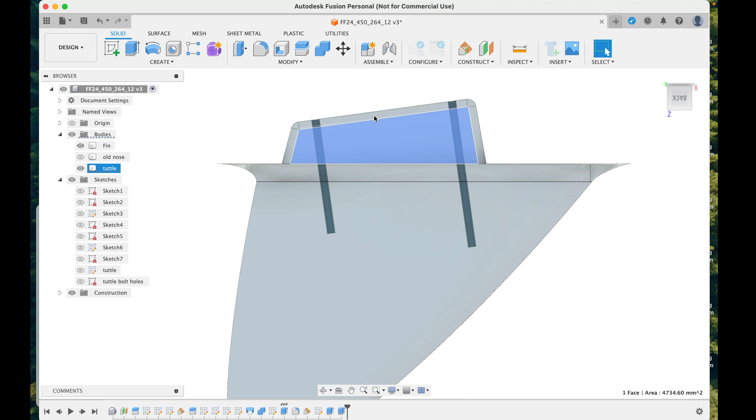So you want to create a sketch on this plane, and then we can push P for that, so we draw perpendicular lines. Doesn't really matter. And then constrain them to perpendicular. Oh, it's already been applied. Perpendicular, that to there. It's already done.

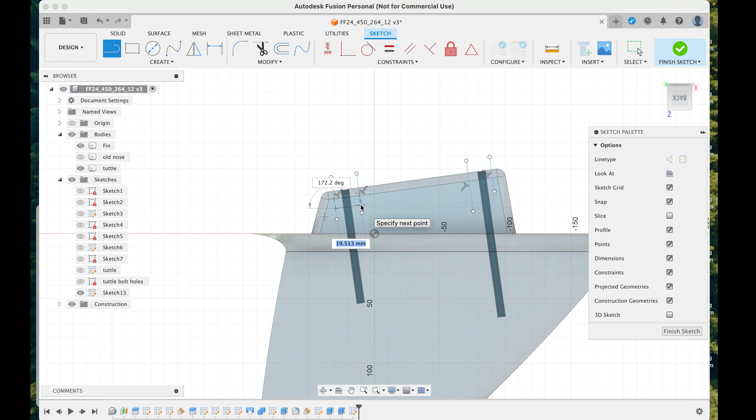And then same up here. And final line. Perpendicular. And then draw the nut recess perpendicular to that. And close the sketch. Finish the sketch. Looks a bit rough, but it'll work for our purposes.

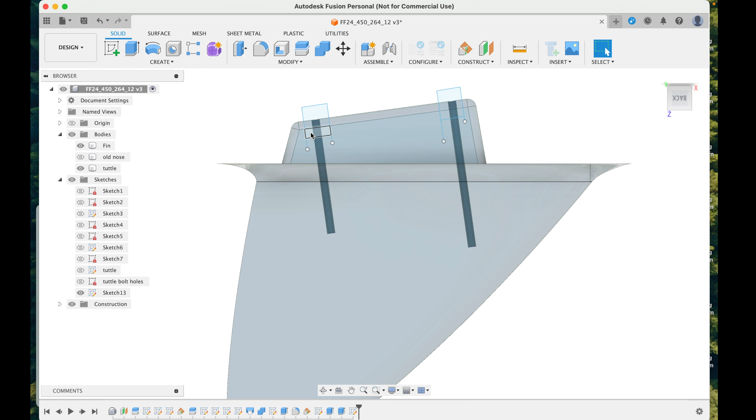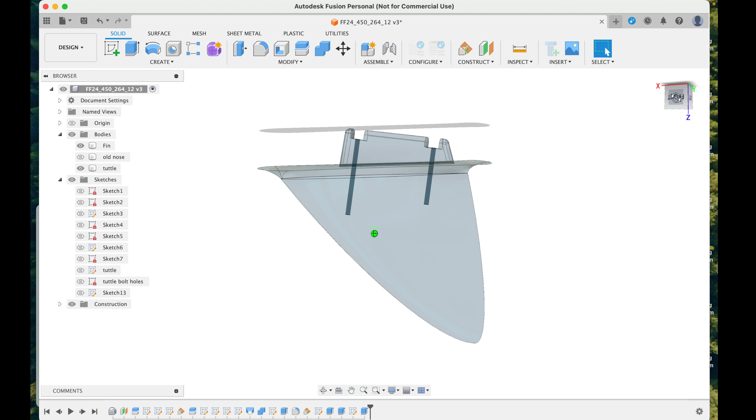Select those, push extrude, look at it from home position, drag it across, and we now should have the tuttle recesses. So that means we can put nuts here onto the threaded rod, and then another nut down here. So what we want to now make is the embedded nuts, so these nuts can pull against.

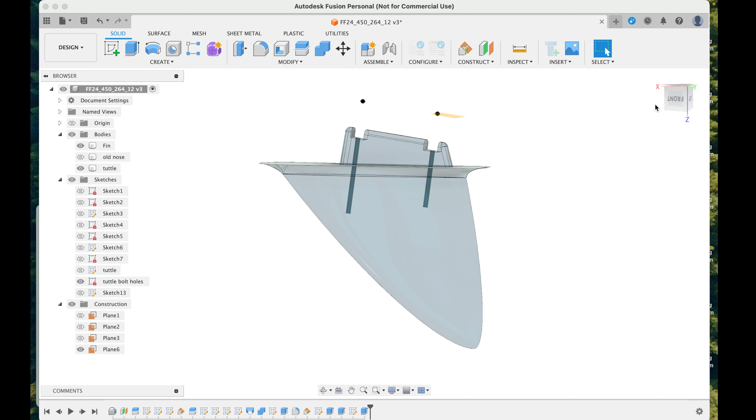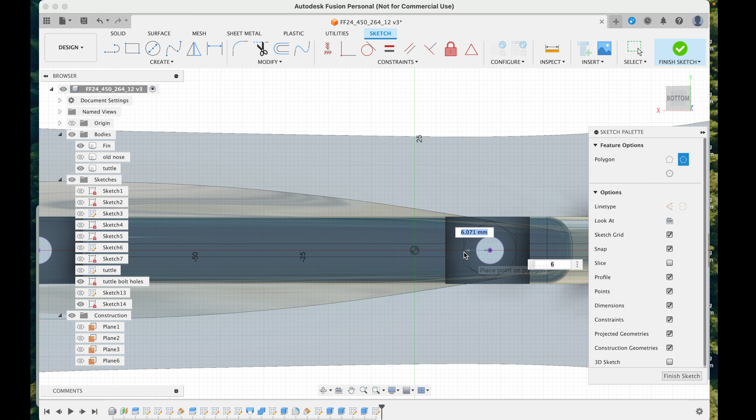So we want to bring that tuttle bolt hole sketch up again, and the construction plane we built it on. So select that construction plane, create another sketch, P, so I get exact positioning. So select the circle, P, create circumscribed polygon, and the polygon, you want the flat edges along the axis of the fin,

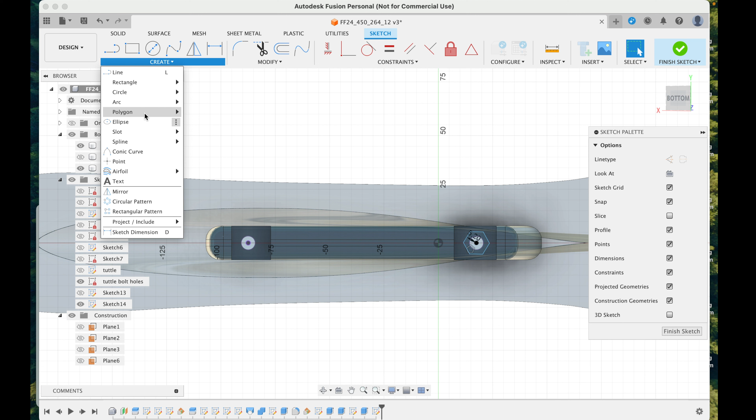is 5.2, I think it is, radius for the nuts I have. And then create another one over here. 5.2, because that's going to give 0.4 clearance on a 10mm nut. So finish that sketch.

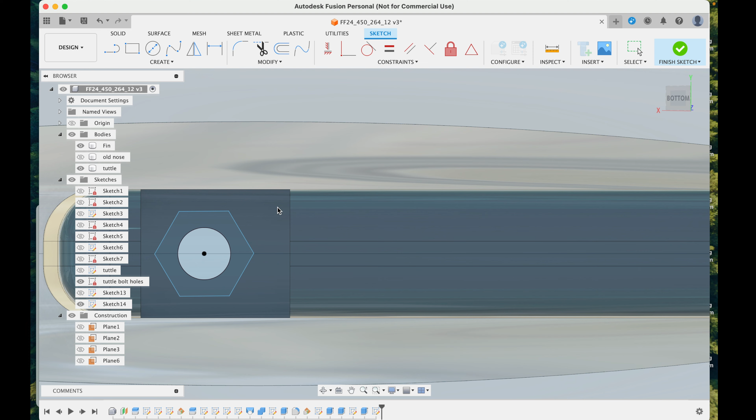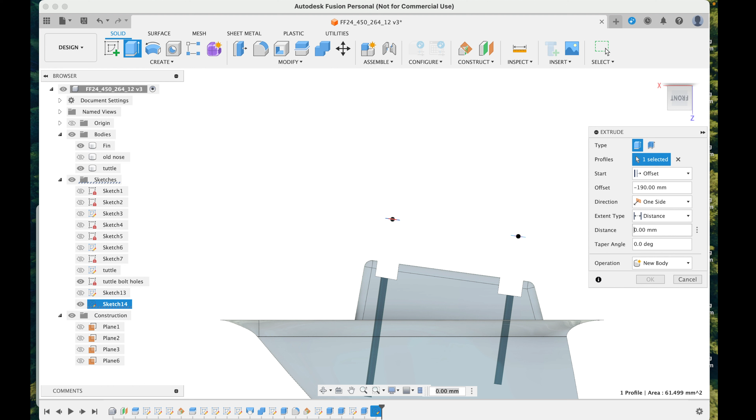Select that sketch, push E, scroll out a bit. Then what you want to do is start with an offset, and the offset's going to be around about -100, I think, and you want to go about -8mm, or not 80, 8mm. That's too far, not 190, 100.

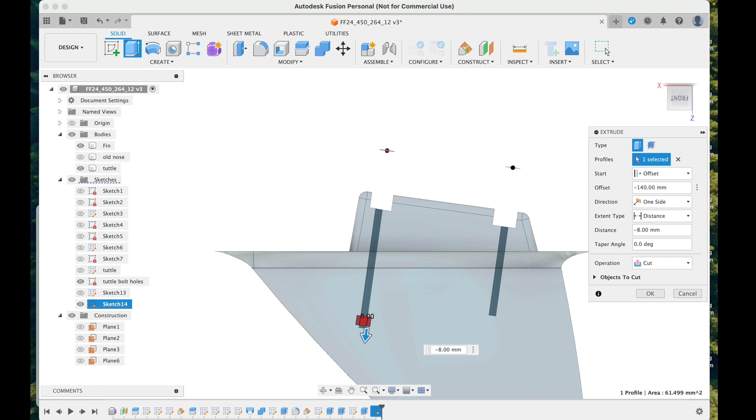So that nut's a bit too close, so we want to go a bit further. 150, so roughly maybe 145. You can fiddle with that. So that'll be the first nut recess. Better write embedded nut recess. Put that cut out.

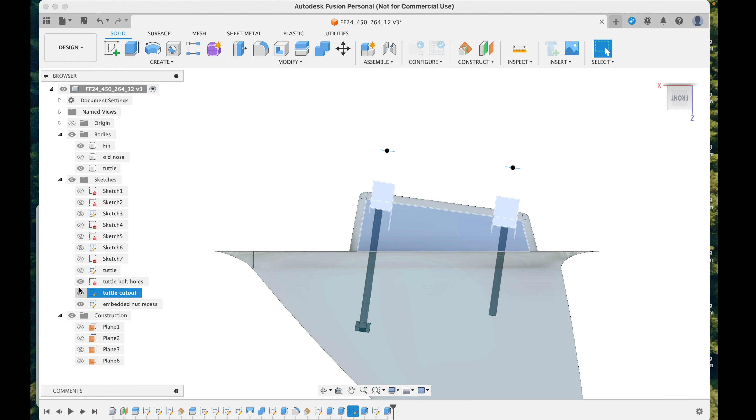Then select that bit there, push extrude, E for extrude, offset, so it's going to be again -100 roughly, and then -8, a bit further. So that's roughly where we want it.

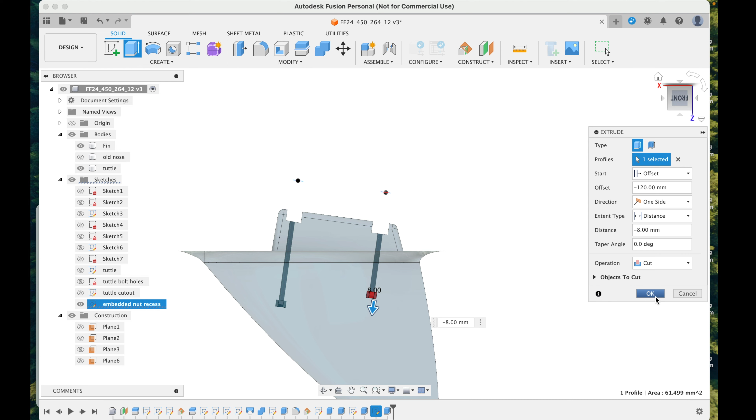And right, now we're going to punch the holes for the carbon stiffeners if you want to use them. So create a sketch on the vertical plane. I typically push line or push L, and I usually do the one to the tip first, and so you want to draw your line where you want the rod to go. I'm just going to do 2 rods to show you the basic idea. You do as many as you want.

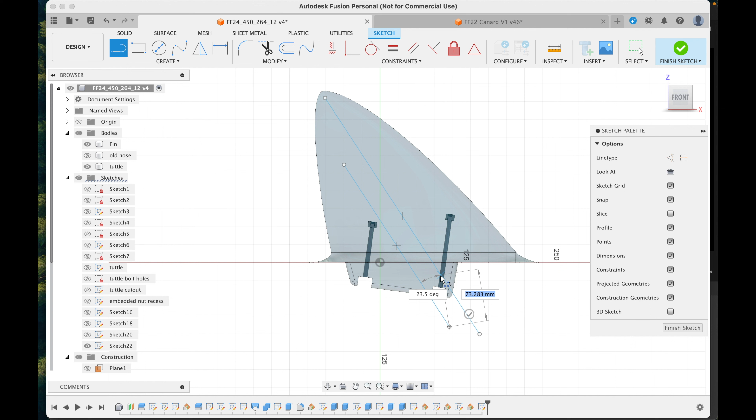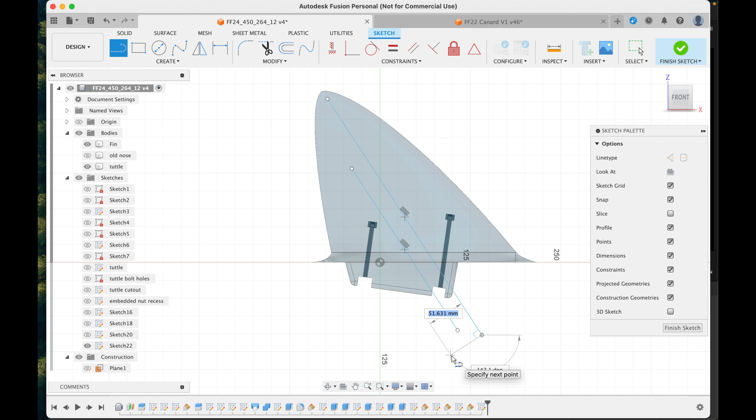So do 2 lines, make them parallel, select the one you want everything else parallel to first, and then select parallel. You can move this second line around, or the first, do whatever you want, position them where you want your tuttle, and then draw a perpendicular line and finish the sketch. Select that line, construct plane at an angle, 90 degrees.

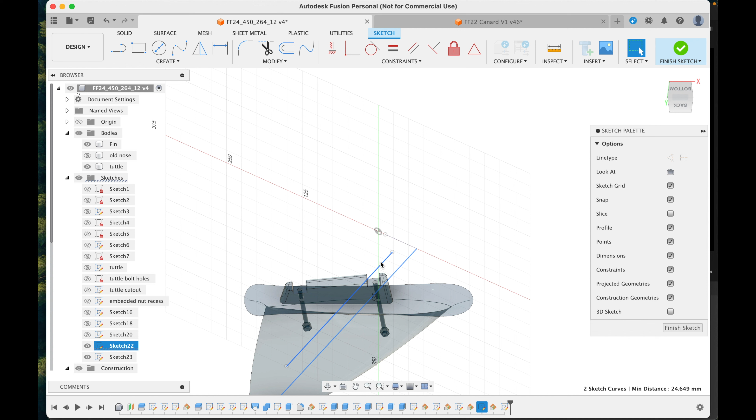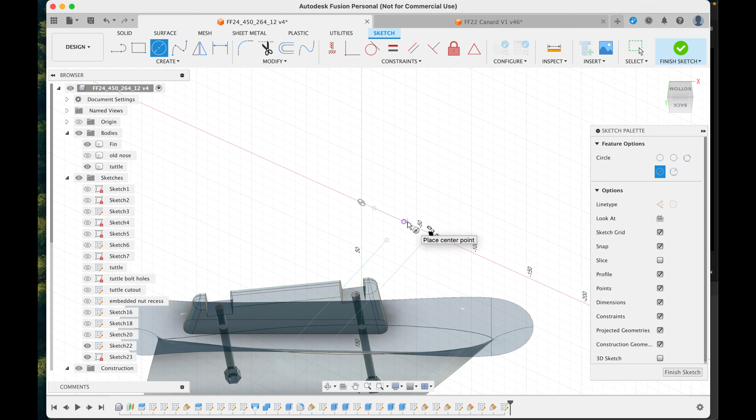Then on that plane, create a sketch, and then you want to project those lines onto your sketch so you get these dots, and then we'll probably drill a 3.5mm hole for the 3mm rod going to the tip. So draw a circle that diameter, and let's say we'll drill an 8.4mm for an 8mm rod there. So finish the sketch, hide that other,

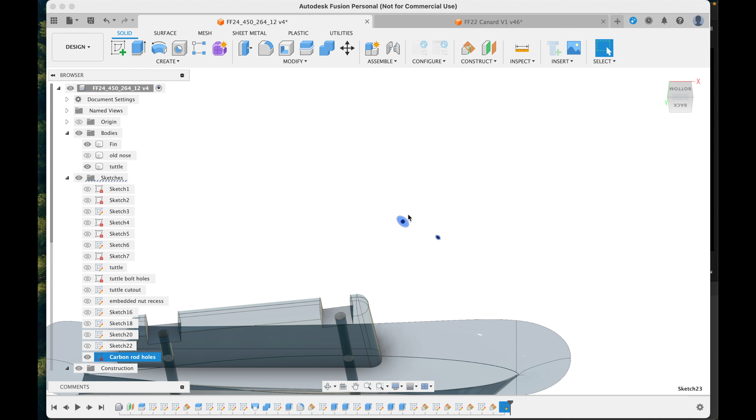and put carbon rod holes. So select that sketch, push E. Oh, I didn't select it. Select one of them, push E. Look at the side view. Now is this the one going to the bottom? No, that's the other. So we want to start with an offset, 100, no, -100. Yep, that's about right.

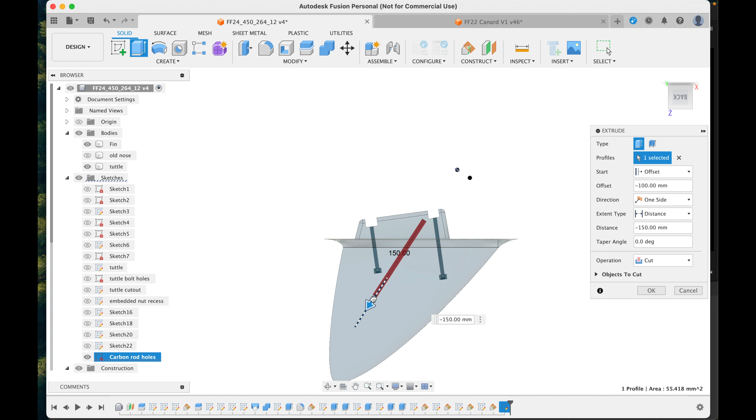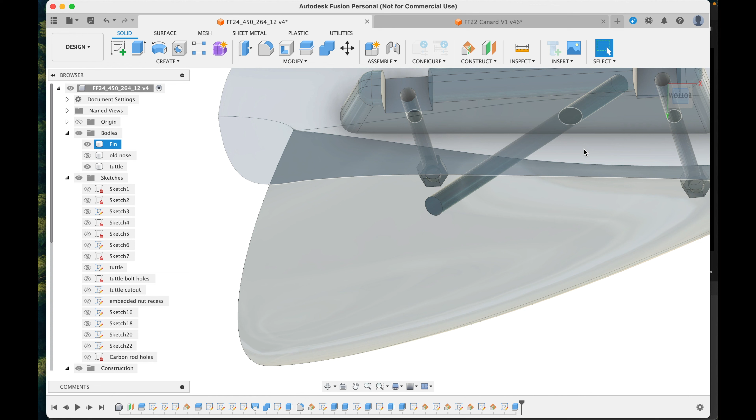And notice when you go too far, the hole comes out the side. So you need to go back to there plus a bit, because that area here will be too thin for your printer to print, and you'll get a hole in your fin. So we've done one, and go and select the other, make it visible again.

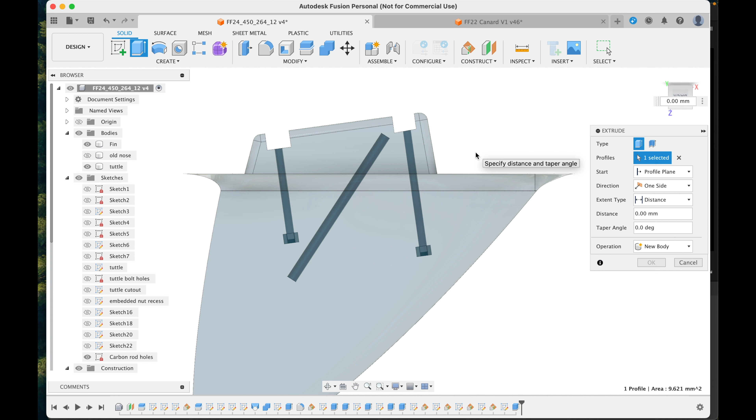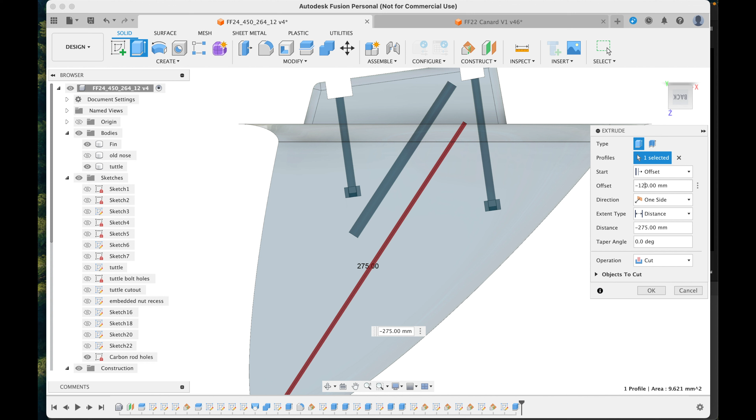Select the smaller hole, like that, push E, look at the side view, and we want to go offset up there somewhere, so it'll be another -80 or so probably, no, it'll be further, -120, something like that. Again, you want to go, well, let's get the offset correct, not quite that far, 110, so that's fine. So you want to find out where it punches out, and then come back probably 40mm or so.

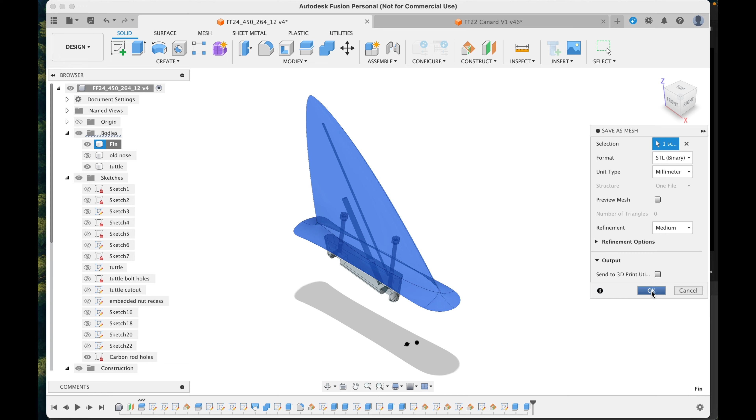And that's your completed fin, ready for 3D printing. So to send to the printer, you would right click on the fin, save as mesh, and save it either as STL or 3MF, and then OK, and you will save it, name it whatever you want, and that'll save it to wherever you want on the computer, and you import that into your slicer. Good to go.

One other thing you can do before you send it to your slicer is inspect it, do a section analysis, select the plane you want to look through, and then you can scrub up and down and see how close to the edges your holes are. So we can see here this hole is fine. That's the end of it there.

We know it's 3.4 millimeter diameter. So this distance probably in the order of 1.5 millimeters. So we've got plenty of width for some epoxy to flow around. So that's it. Cancel that and send it to your printer.